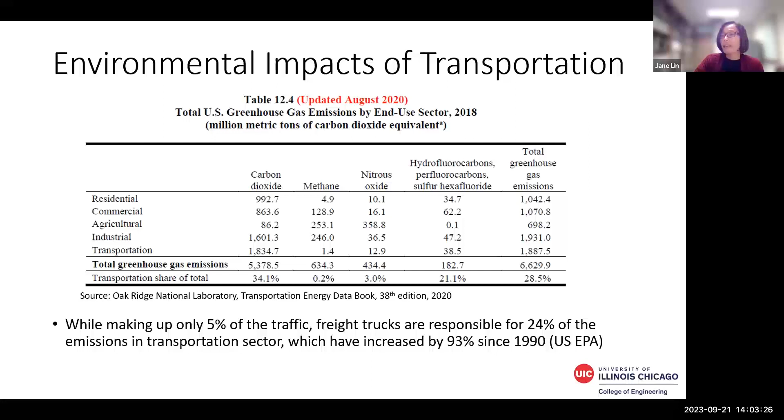So that's why we need to also pay attention to freight vehicle emissions and energy consumption, and anything we could do to mitigate the greenhouse gas emissions and energy consumption from this sector will really help the sustainability of transportation. Another reason why my group is particularly interested in freight vehicles is because we have all experienced this in the past 3 years, especially during the pandemic.

And guess what? For the package to get to your doorstep, there are trucks behind the scenes doing the deliveries. So truck traffic has really gone up, and the traffic composition has changed. We replaced passenger vehicles with bigger, heavier, and more polluting vehicles on road. That really implies a worsening situation in terms of total greenhouse gas emissions and energy consumption.

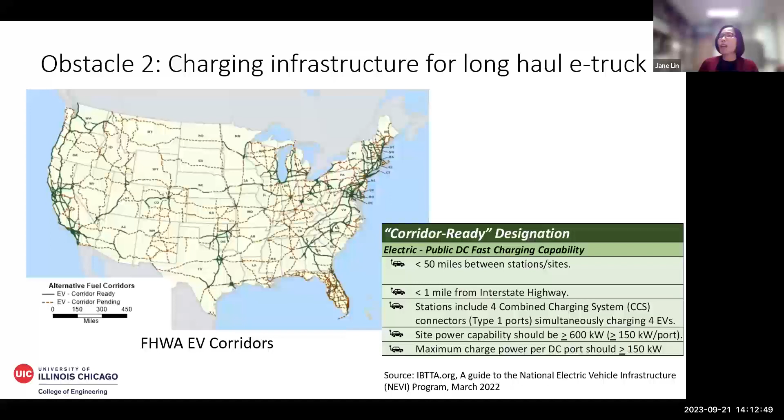We're not talking about level 1 or level 2 infrastructure. So what that means is the charging rate must be at least 150 kilowatt charging rate, right? So the third obstacle, the high adoption cost.

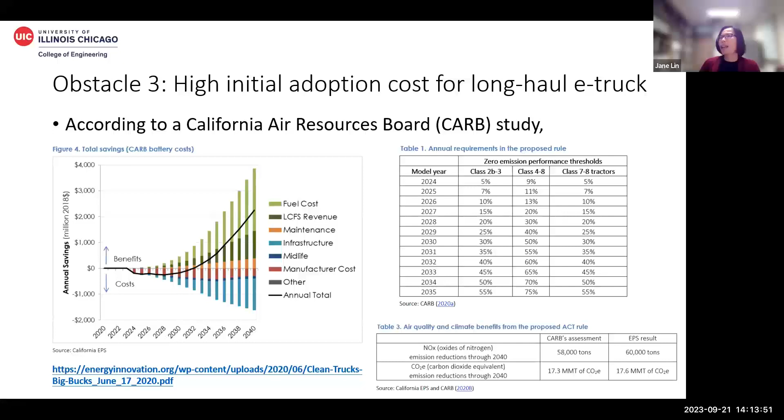So you see that initially it's going to incur cost. And then in the long run, hopefully, as the technology becomes cheaper and so on, it will incur benefits. But the initial value is negative, meaning the initial adoption cost is high. Okay, so that's another obstacle that the industry is facing and the government is also facing.

The last one, as I mentioned, the charging time. Obviously, for each truck, the battery size is large. And from the carrier and the driver's point of view, the charging time, just like the break time and rest time, is unpaid for drivers. So that's one of the reasons they're not willing to use e-trucks, because if you have long charging time, it's unpaid time. So why should I use an e-truck, right?

In addition, I also want to point out this very important regulation, which we're going to incorporate in our analysis later on. All truck drivers must follow this hours of service (HOS) regulation for the on-duty time, the cumulative driving time, break time, and rest time. So after certain hours, you must take a break or rest, for safety reasons, right? So all these are disincentives for truck drivers or carriers to adopt e-trucks.

So then we have a number of research questions we'd like to answer. For example, where to deploy these charging stations along the highways, right? It's an indirect response to the lack of charging infrastructure question. And then when to charge. The idea here is that because of this long charging time, and it's unpaid from the driver's point of view, we want to minimize the impact of this charging time as much as possible on the total journey time.

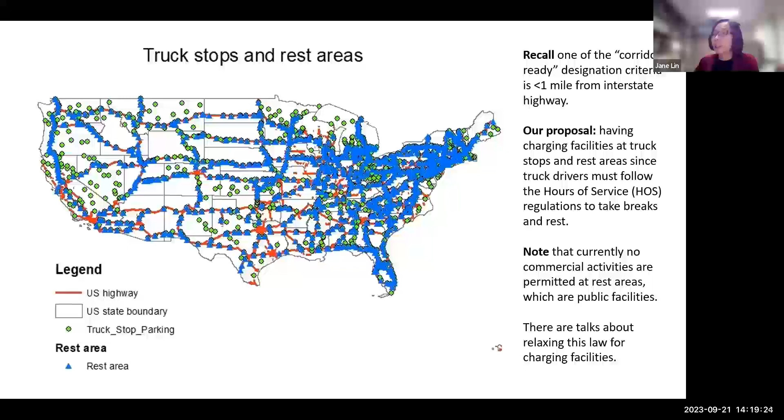So this is a hypothetical study. Just keep in mind that currently it is prohibited by law to have any commercial activities at the rest areas. If these charging stations are run privately, it would be considered commercial activities. So this is really a purely hypothetical study. However, from talking to IDOT project managers, there has been some talk about maybe changing the law to allow this kind of activities at the rest areas. So let's hope that's the case.

So if we further constrain the candidate rest areas and truck stops within 5 miles of the high voltage electricity transmission lines, because in order to build a charging infrastructure, you need to have this high voltage electricity transmission line, then this is basically all the candidate rest areas and truck stops in the whole national highway network. So these are the candidate sites for the charging stations in our study.

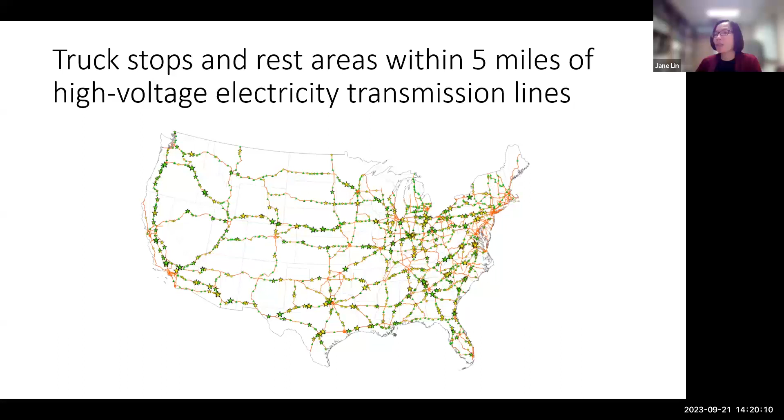Okay, so how do we answer those questions? Basically, we build a mathematical model to optimize the electric routing and driver scheduling problem with coordinated charging schedules. The idea is minimizing the total truck routing cost subject to the hours of service regulation. And by doing so, we can figure out where to locate the charging stations along those candidate rest areas and truck stops, how many chargers should be installed at each of these locations, and when to charge for the drivers. So that's the idea.

In this model, there are 6 cost components in the total cost function. One is the purchase cost, because we want to compare the e-truck with the diesel truck. We'd like to see what impact the high e-truck purchase cost has on the total operating cost. Then we also consider the maintenance cost. In the e-truck case, that includes the battery replacement cost, because the battery is very costly, so we take that into consideration.

And obviously, we consider the driver's cost and the energy cost, which has 2 parts. One is when the vehicle is moving, that's called the routing energy cost. And then when the vehicle is idling at rest or taking a break, because oftentimes the truck needs heating or air conditioning, the auxiliary power unit is still running and consuming energy. So that's the idling energy cost.

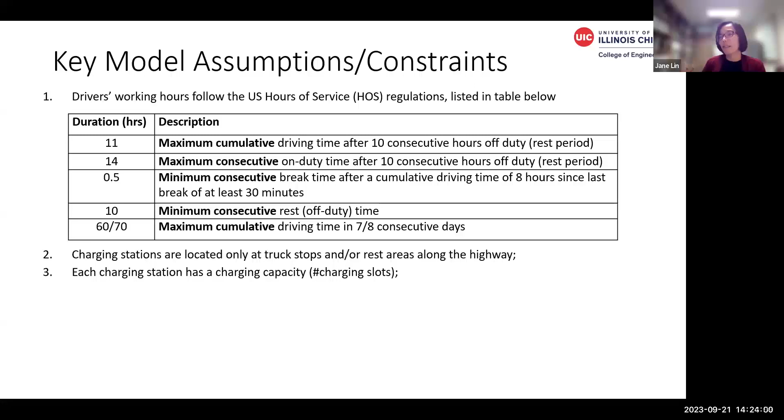Another key assumption, as I mentioned, is that the charging stations are located at those candidate truck stops or rest areas along the highway. We don't consider any other locations for the charging stations. We also assume each charging station has a charging capacity, meaning the number of charging slots. So there is a capacity limit. If the demand is greater than the number of charging slots, then the trucks must wait for charging.

And the state of charge of the battery must be maintained at a certain level at all times. In this case, we use the literature finding that typically 20% of the battery capacity is considered the lower bound of the state of charge. So the battery has to maintain at least 20% of the total battery capacity at any time.

And this number 5 assumption is probably the most important one. So the idea here is to synchronize the charging schedule, the routing schedule and the hours of service schedule for the drivers, right? So we want to take advantage of these hours of service regulations, the mandatory times for drivers, and then say, okay, if the driver must take a break for at least half an hour, then the truck will also need to charge at that time.

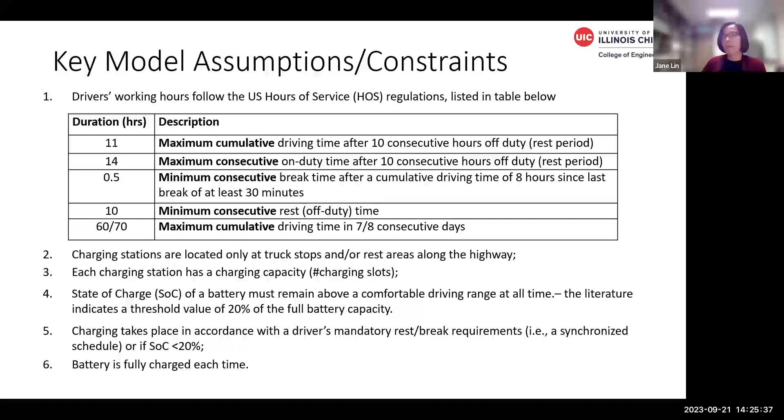And so if the charging time is greater than half an hour, so be it. That will be the total break time, because the half an hour is the minimum. And in the case if it's still within the hours of service time, but the state of charge is less than 20%, then the truck must charge and the driver must take a break or rest at the same time. And the last assumption, we assume that the battery is fully charged each time it is being charged. So it's charged to full.

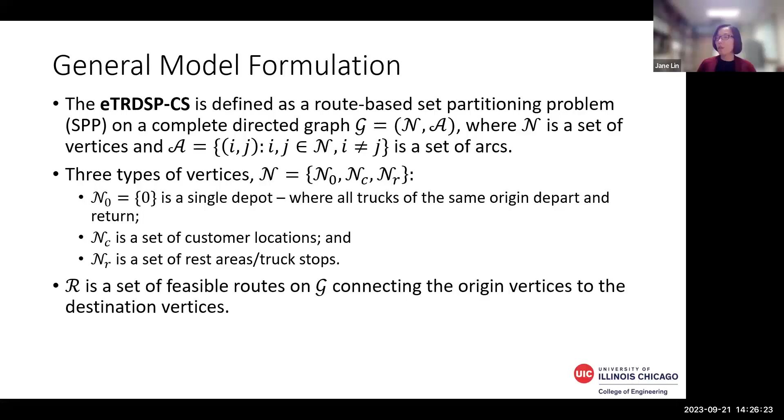Okay, so basically the general model's formulation is a route-based set partitioning problem. So we consider a complete graph with a set of vertices and a set of arcs. There are 3 types of vertices. One is we assume all the trucks start from a single depot. There's also the customer locations, as well as the charging stations, the rest areas, and the truck stops. And then we also define a set of feasible routes for any origin-destination pairs, right? So it will be a set of feasible routes connecting each OD pair on the network.

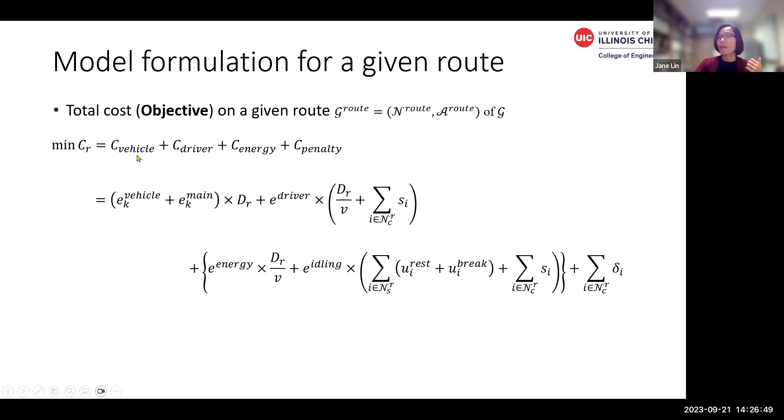So then the general formulation would be basically to minimize the total cost of all the possible routes on the network for all the OD pairs. And so that's the idea. So then for each OD pair, the minimum total cost route would be formulated as such, right? So it would be the vehicle purchase and maintenance cost, the driver's cost, the energy cost for moving energy and idling energy consumption, and the penalty cost.

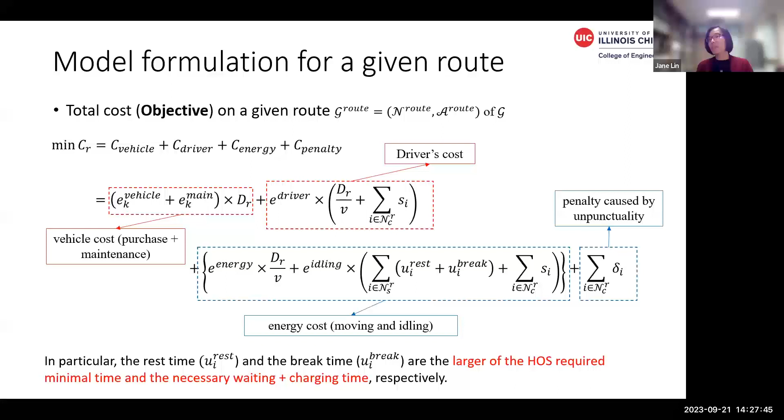So I want to also point out the 2 decision variables, the time for resting and time for break. The rest time and the break time are the larger of the hours of service required minimum time, and the necessary waiting time and charging time combined with service time. So if the necessary waiting time and charging time is greater than the minimum break time, then the actual break time will be whatever is necessary for the charging and waiting in the model.

Because we assume there is a charging capacity at each charging station, we basically have to model the waiting time if the demand is greater than the capacity, right? So we basically just use a very typical M/M/C queuing model, assuming Poisson arrival and departure, with C the number of chargers at a charging station, right? So we can work through the probability of queue length and waiting time and so on mathematically.

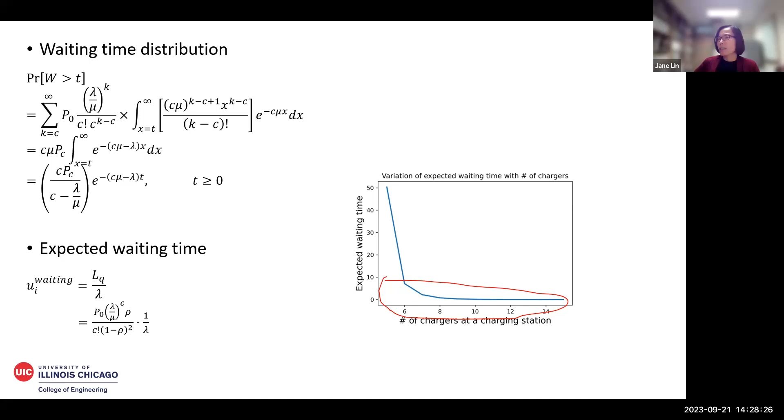But I want to also mention that we did some numerical analysis to show that the total number of chargers is bounded by this ratio, right? Lambda divided by mu. So we decided to give a little bit of buffer, so it would be lambda divided by mu plus 2. And then if we use this to do some numerical empirical analysis, it shows that the expected waiting time is a decreasing function of the number of chargers at a charging station, obviously.

But interestingly, if the number of chargers is 6 or higher, then you see that the expected waiting time is drastically reduced, this is in minutes, from 50 minutes to less than 10 minutes. But if you further increase the number of chargers at a charging station, for example, 8 or higher, then this reduction is really very minimal.

So in other words, the number of chargers at a charging station would probably be feasible between 6 and 8. If you want to have more than 8, the benefit of reducing the waiting time is really minimal. So there's probably no point in increasing the number of chargers, because there's also a cost associated with that. So in this study, later on, we actually fixed the number of chargers at each charging station at 6.

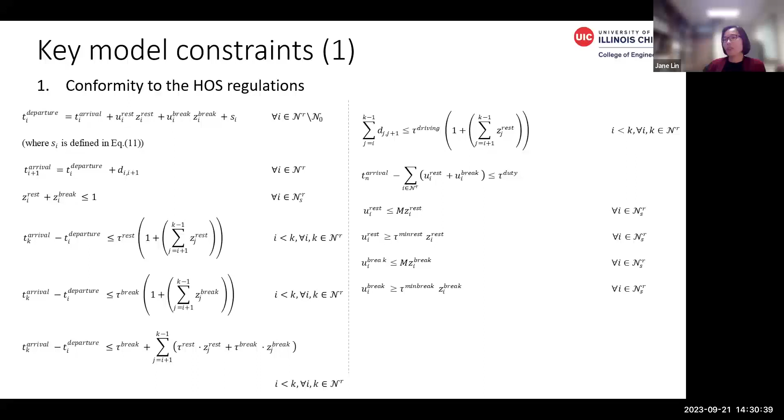So in terms of the model constraints, in the interest of time, I'm not going to go over each one of them, but we have 3 key sets of model constraints. The first one is obviously all the operations must conform to the hours of service regulations. And then the second set of key constraints are the synchronization of charging activities with the rest and break activities. So the schedules must be synchronized.

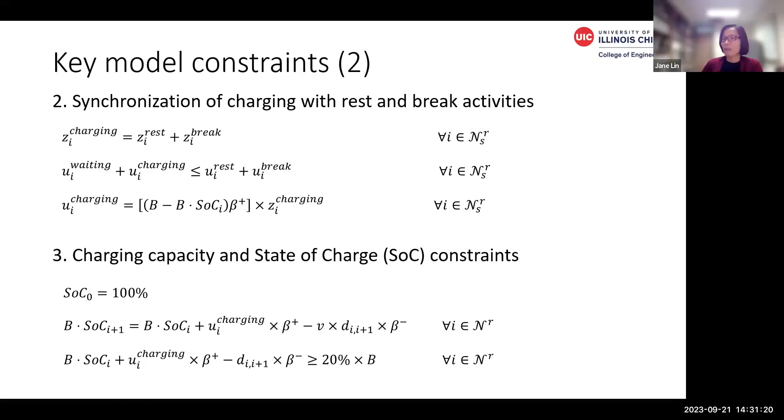And the third set of constraints are the charging capacity, the battery capacity, and the state of charge constraints, right? So we say it has to be maintained at all times at 20% and higher, and the initial will obviously be 100%. So we have to make sure that when it's going to go below 20% at the next possible charging location, then the truck must charge at this current charging location.

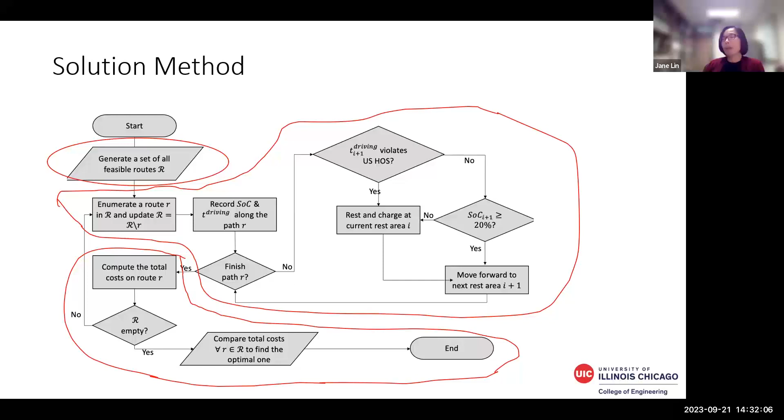So that's the idea. In terms of the solution method, this flow chart shows step-by-step how to solve this problem. Essentially, there are 3 key steps. The first one is to generate a set of all feasible routes, this R set. And then for each of these feasible routes, we calculate the total cost based on the cost function we defined earlier, and the model constraints, to figure out the minimum cost routes for each OD pair. And then we do so for all the OD pairs, and then calculate the final total minimum cost for the entire network, right?

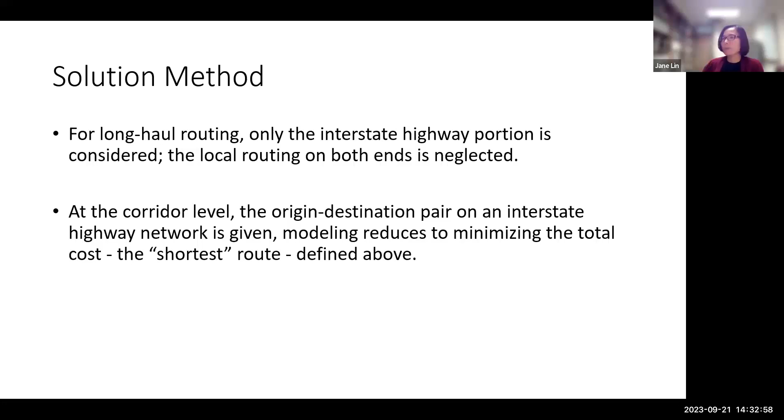So obviously there are some further constraints we consider in the solution method. For the long haul routing, we actually ignore the local routing, the detour portion of it. We only consider the interstate highway portion from the beginning of the interstate highway to the end. And also at the corridor level, the origin destination pair on the interstate highway is given, right? So basically the model is reduced to minimizing the shortest path, so to speak, the minimum total cost route.

So then we apply this model to 4 case studies, in the order of increasing distance. The first one is on I-55 from St. Louis to Chicago, just a little bit less than 300 miles. The second case study is from Chicago to Atlanta, 758 miles. The third one is from Los Angeles to Denver, a little bit over 1,000 miles. And the last one is coast to coast, from the West Coast, Los Angeles, Long Beach, to New York City port. That's 2,838 miles. So we look at these 4 case studies.

I want to point out that for all these case studies, as you can see, these are all corridor studies, meaning the origin destination are all given. So currently, she is working on extending this work to the entire national highway network system, with true multiple origin destination pairs and the OD flows for the entire national highway network.

And this is the table that shows the values for key parameters in the model. I'm not going to go over all of them, but I did highlight some. For example, the charging rate for the e-truck, we assume is 300 kilowatts. And remember, in the designation criteria, the charging rate is at least 150, so we double that rate. This is not the highest charging rate available in the market, but it's a decent charging rate. And the battery capacity, we assume it's 300 kilowatt hours. It's on the lower end of battery size in the current market, but it's still a large battery size. And the number of chargers, as I mentioned, we set to 6.

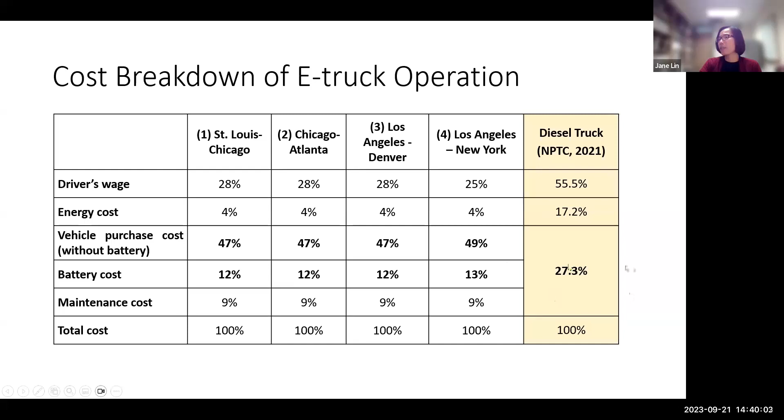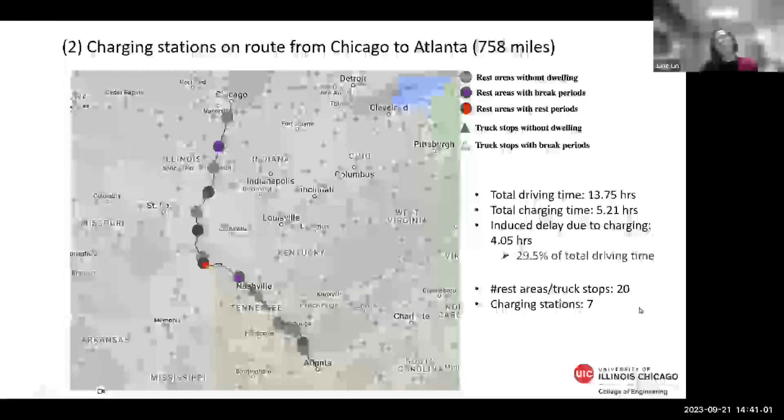And if you look at Chicago to Atlanta, again, certain stops or rest areas must be chosen as the charging stations. The total charging stations required for this corridor is 7 out of 20 rest areas and truck stops along this corridor. And if you look at LA to Denver, there are a total of 30 rest areas and truck stops, and 11 of them are chosen as the charging stations.

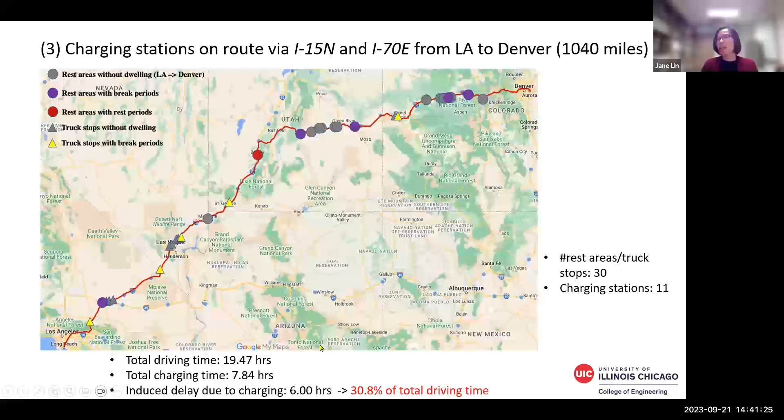And then this was already shown in the previous slide. Total driving time, charging time, and the induced delay is about 30% of the total driving time. And in fact, the induced delay is about 30% of the total driving time in each of these cases.

And the last one, from LA to New York, the total number of rest areas and truck stops in this corridor is 80, and 28 of them are selected as charging stations. And the induced delay, again, is about 30% of the total driving time.

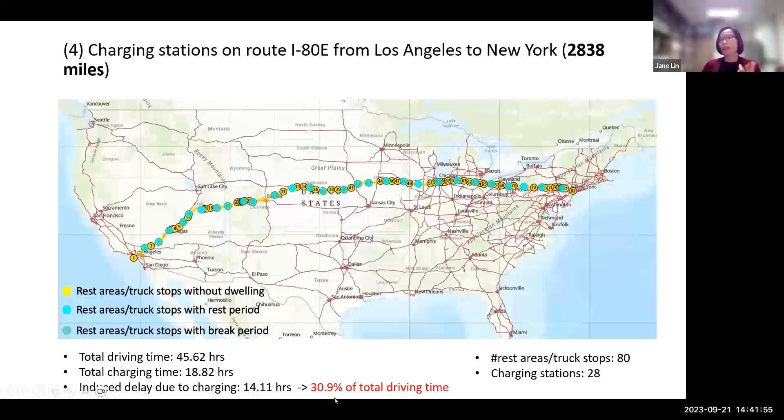So obviously, these results are subject to the values we pick for the parameters, right? So then we did some sensitivity analysis. The first one is the total cost with respect to the e-truck purchase cost without the battery. Okay, so we consider the battery separately.

Okay. However, the prolonged journey time represents an opportunity cost, because in order to provide a similar service, the carrier may have to have a larger fleet, because the turnaround is slower due to the longer journey time, and so on and so forth. So that's the cost imposed onto the carrier or the truck drivers. That's called the opportunity cost.

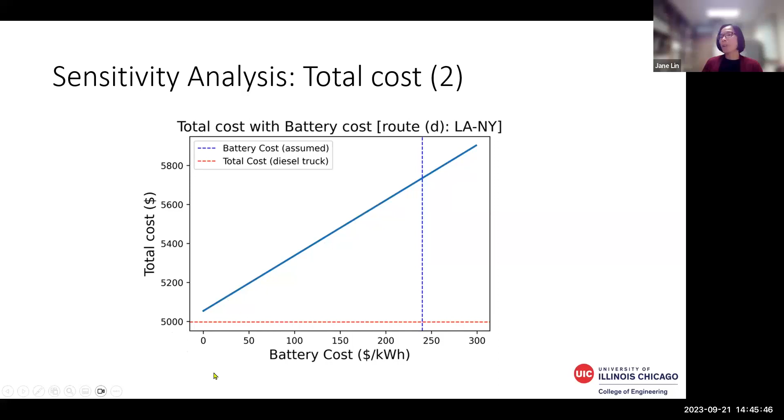And then if we look at the impact of battery cost on the total cost, this is the e-truck total cost, and this is the model's assumed battery cost, right? As battery capacity and technology advance, the cost is likely to go down. So we're going this way. But the interesting thing is, even if we reduce the battery cost to zero, it's still greater than the total cost of the diesel truck, with the purchase cost assumed in the model and so on. So even if we completely ignore the battery cost, each e-truck still costs more than the diesel truck.

Okay, so to summarize, I hope I demonstrated to you that it's technologically feasible to deploy e-trucks for long haul operations compared to diesel trucks, because we showed that with the existing infrastructure, we can locate charging stations at rest areas and truck stops, and at the minimum, we only need to convert less than 40% of them to meet the demand. And the benefit is over 70% energy saving from e-truck operation.

However, the study also showed there are great hurdles to overcome, right? The high initial adoption cost, the purchase cost of the e-truck. Unless the cost goes down significantly, close to the diesel truck cost, the cost remains higher for e-trucks. And this prolonged journey time affects scheduling, fleet turnaround, and charging infrastructure, because it takes longer for the fleet to turn around to meet the demand.

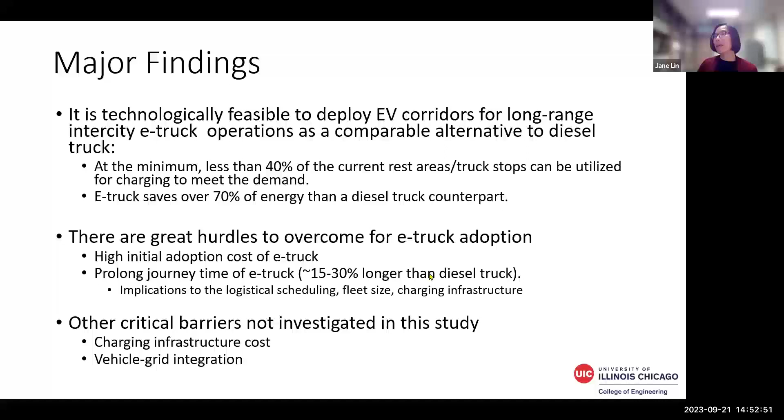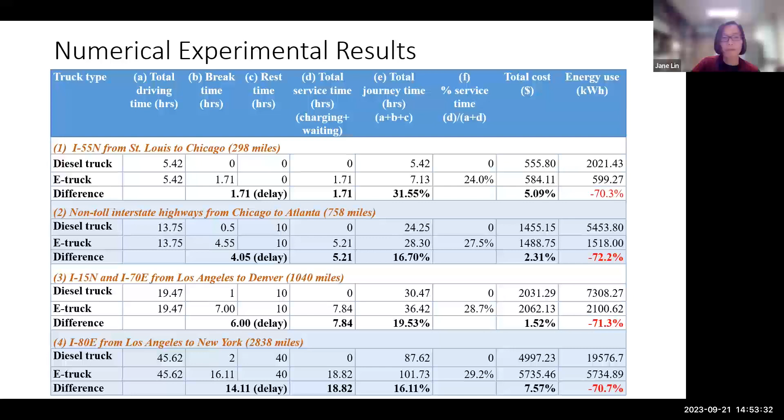Okay, Professor Lin, thanks for the interesting presentation. Just a quick clarifying question. You seem to assume that you know the route of the traffic, or is that endogenous?

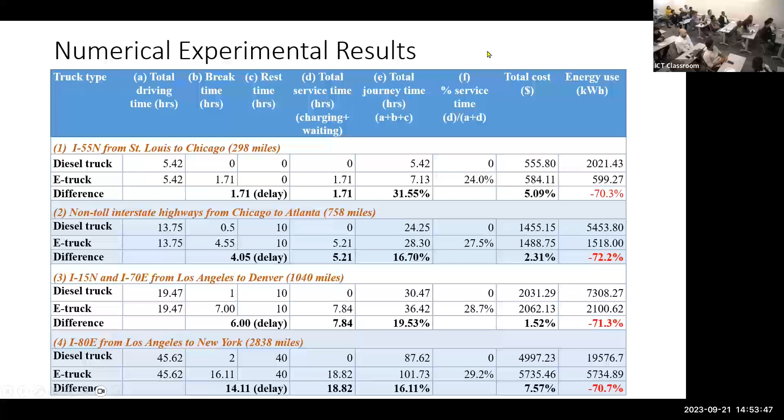Very good question, route choices. Very good observation. As I mentioned, all these 4 case studies are corridor analysis. So we simplified it because it's a corridor, so we know the origin and destination. So you can quickly determine which route is the shortest route, roughly speaking.

And on top of that, for long haul, typically you run on the interstate highways. You don't go on the local streets for the operation. So we restrict this to only the interstate highway system, and we just predetermine the route for the corridor analysis. But as I mentioned, for the network level, many-to-many OD pairs, that becomes a different animal. That's what my student is working on right now.